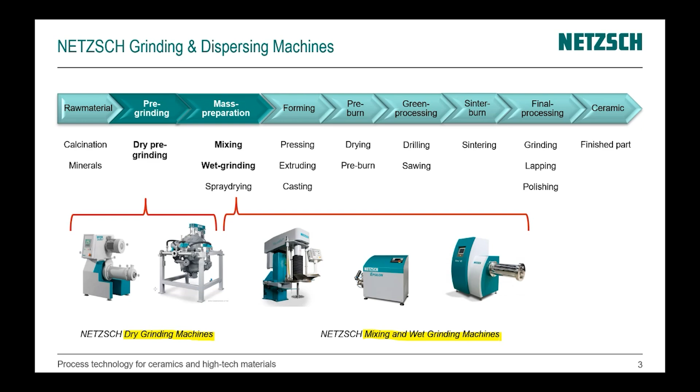ceramics. And probably it will be interesting for you to see that this company, Netzsch Grinding and Dispersing, produces dry grinding machines, which are used for ceramic production in big volumes, and also Netzsch mixing and wet grinding machines. So for those of you who are interested in the big machines, it could also be interesting. And now about our part.

We produce laboratory instruments. For example, STA, simultaneous thermal analysis for TG, thermogravimetry, and DSC, differential scanning calorimetry. Then dilatometry, LFA, laser flash analysis, and so on. We use it if the customer would like to know the behavior of a material at some temperature which can be measured, for known time and known temperatures inside the measured range of our instruments.

But sometimes, especially for ceramic situations, the temperatures are higher than the temperatures we can measure. And in this case, in order to know what happens with the material at high temperature, we use software called Kinetics Neo. It works also for milligrams and for known temperature. It takes data which are measured in the laboratory. After that, we create a kinetic model based on this data.

And after that, we can use this model to simulate what happens with the material outside of our measured range. For example, at temperatures higher than our measured range, or what happens during your industrial process, during the production of ceramics. Because of course we cannot put our laboratory instruments in the production process, but we can use Kinetics Neo to simulate and see what happens.

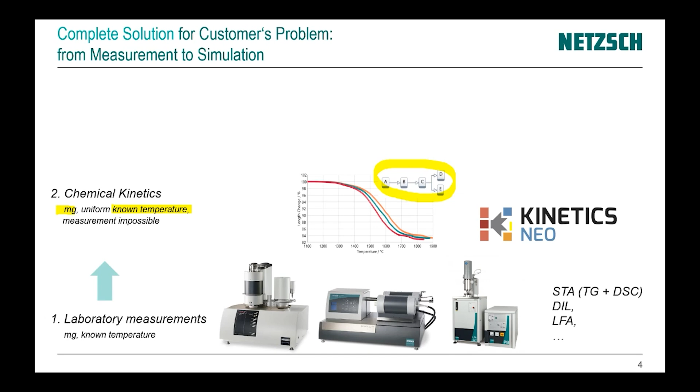For this case, we use our software, which makes a simulation in the bigger volume. It's called Thermica Neo software. It works for higher amounts of material, it takes into account temperature gradients, and it can show how a reaction goes on inside the big volume of material, how the sintering, how the debinding goes on.

Now we will speak about these two packages, Kinetics Neo and Thermica Neo. Let's start with the first one, Kinetics Neo. If we produce ceramics, for example, medical ceramics, high-tech ceramics, then the quality must be high. Sometimes if we use the microscope in order to see what is inside ceramics, we see cracks. And these cracks show us how high the quality of the ceramics is.

We would like to have the highest quality and to avoid micro cracks if possible. In this case, we must take into account the heating rate during our production. If everything goes slow, then the quality is higher and we have less microcracks. If we make the heating very fast, then there are some temperature gradients inside and the shrinkage is not uniform, and therefore there are mechanical stresses and the quality could be decreased.

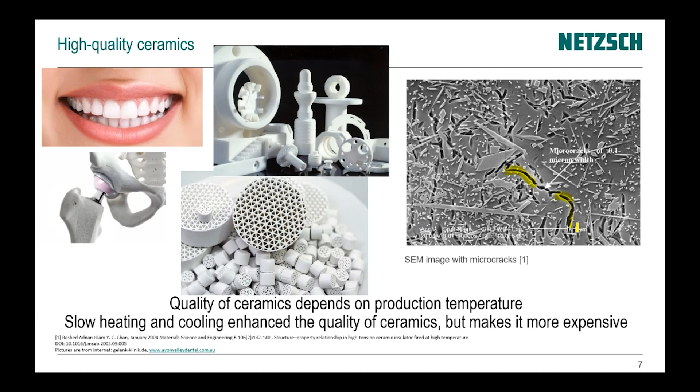So there should be some kind of optimal temperature program in order to get the best quality in the shortest time. It must be as good as possible, but as short as possible, because for the longest time the quality will be good, but at high temperature it will be very expensive and sometimes economically not reasonable. In this case, we use our instrument in order to see inside the firing process of ceramics.

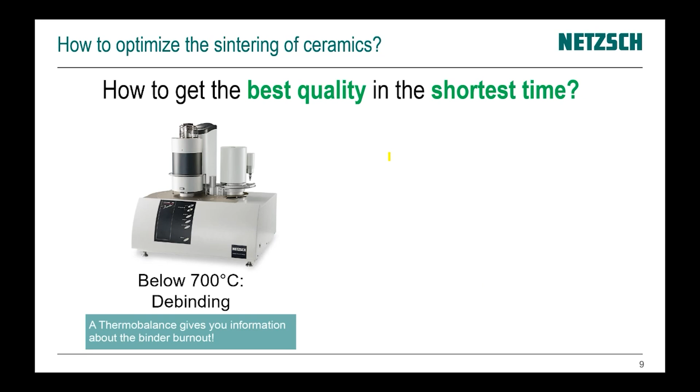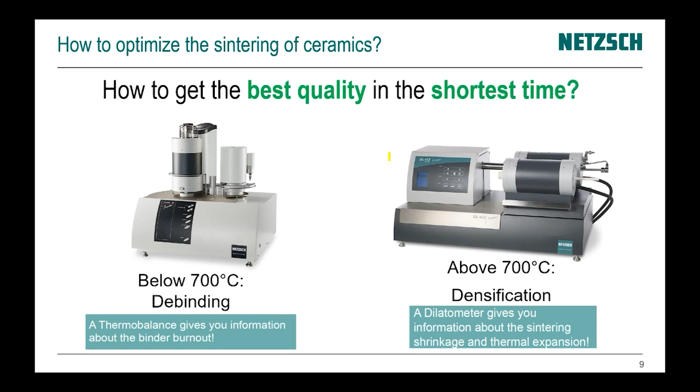There are two parts. The first part is below 700 degrees C. Here we have debinding of polymer, and we can measure this process with a thermobalance, with thermogravimetry. The second one is above 700 degrees C. It's densification of our ceramics. Here we have the changing of the length of our material, and we can measure this change of length with a dilatometer above 700 degrees C.

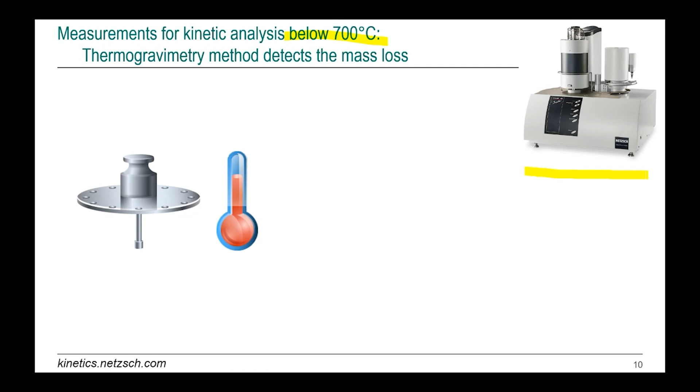How does it work? For example, below 700 degrees C we use our TGA measurement. We take our material in the laboratory, we heat it and measure the mass loss. At the beginning we have an initial mass, then a final mass, depending on the temperature. At some temperature, decomposition happens. But it doesn't always happen at the same temperature. If you make fast or slow heating, this decomposition happens either at lower or higher temperature, because our process is a kinetic process and it depends on time and temperature.

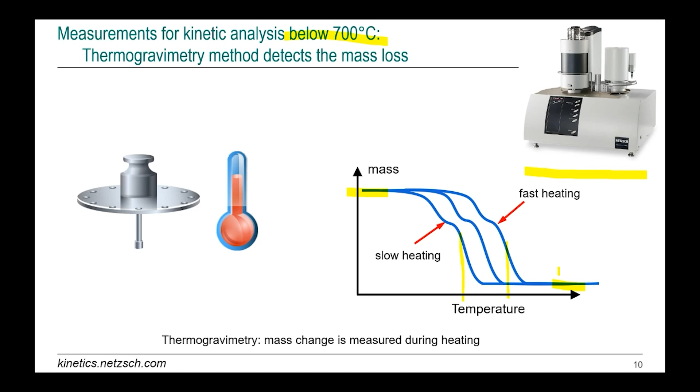Here, for example, we make real measurements with 0.1 K per minute, 1 K per minute, 10 K per minute, and we have 3 different curves, and we see the first decomposition step and the second decomposition step. Then inside our software, Kinetics Neo, we can create one kinetic model. Here is the first step, A goes to B, and then the second step, B goes to C, and this one model must be independent of time and temperature.

So it contains parameters which are independent of the time and temperature process. For example, activation energy, the concentration of initial reactant, concentration of the product, concentration of intermediate reactants. It depends on parameters like the pre-exponential factor. Behind this model is the Arrhenius equation, which shows how reaction rate depends on these parameters and on temperature.

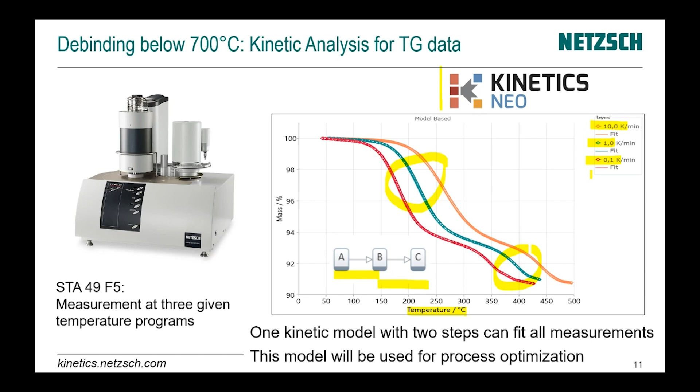If this model works well for all experimental data, for all different heating rates, then we can take this model and make a simulation at other temperatures and heating rates. So we take experimental data, create a model, and then use this model inside our software to see how decomposition goes on under any temperature program, for example, the temperature program of your production process.

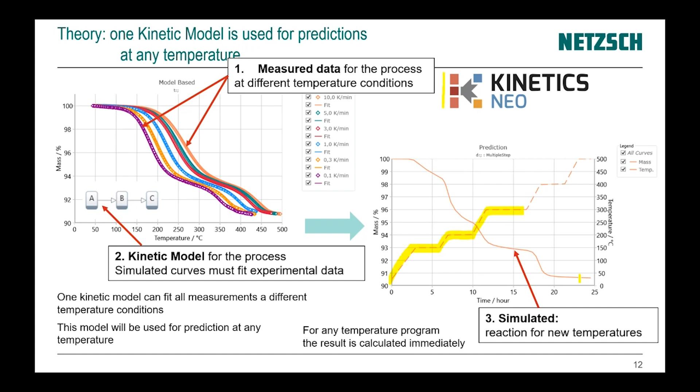Or, for example, here we can take some temperature program with heating and isotherm and see what will be the decomposition for this temperature program. And for optimization, here we can think of it as an example. We have some temperature program which has some isothermal and heating segments, and for this temperature program, we have a curve which shows the decomposition profile.

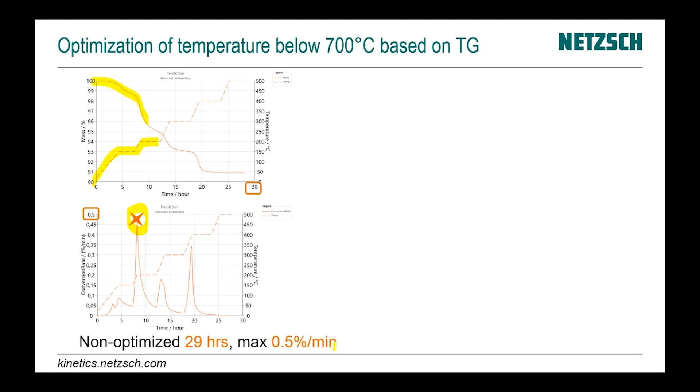The second picture is the first derivative of our simulated curve, or just a curve which happens during our production process. And now, if we would like to see how to optimize our production process, our industrial process, we can find firstly the points where the reaction rate, the decomposition rate, is the highest. So it means the points where we lose the quality. And we must additionally find the points where the reaction rate, decomposition rate, is too slow, so where we lose the time.

Why do we lose quality at this point? Because during the very intensive decomposition of polymer, we have production of gas because of decomposition. And if this happens very intensively, then usually for pressed ceramics there is no time for this gas to go out from our ceramics. And then this gas can destroy or damage the structure of our ceramics. So we must avoid the points with very intensive gas production, with very intensive decomposition.

And here, for the non-optimized process, we have 29 hours and 0.5% per minute. Here is the maximum decomposition rate. After optimization of this process inside our software, we can make it a little bit slower here in this range and a little bit faster in the range with slow decomposition. And here is our result.

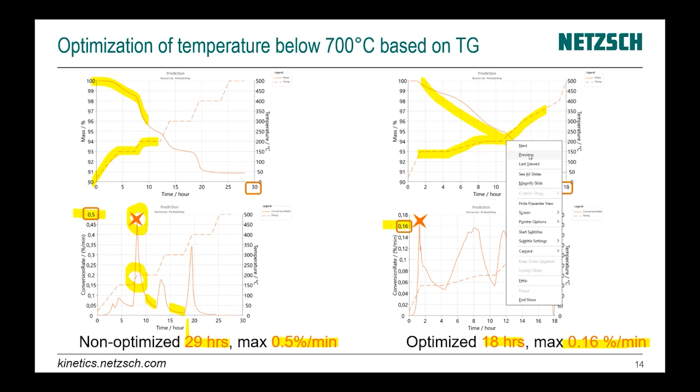Optimized, we have 18 hours, maximum 0.16% per minute. So here the maximum decomposition rate is almost 3 times less. So we have decreased the decomposition rate, we have improved the quality, and we have reduced the time during our sintering process. So this is the optimization of debinding below 700 degrees C. And now here we have an optimized temperature profile, something like this, and a more or less constant decomposition rate. Here is our result.

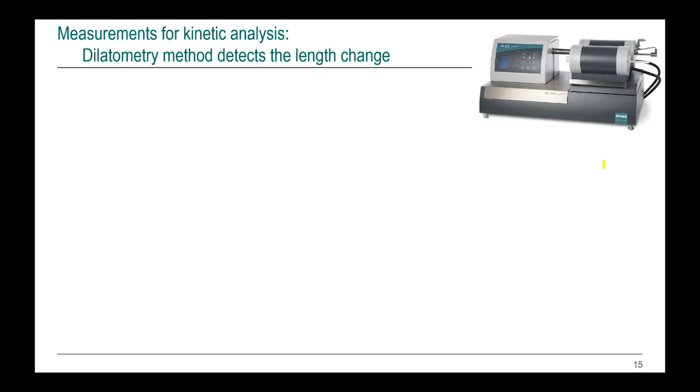And now let's see what happens above 700 degrees C. We take our dilatometer and measure the change of length of our ceramics. We measure the densification process. Here is our result. We have originally the thermal expansion. After that, there is sintering, so reducing the length of our material. And after that, we have thermal expansion after the sintering process for the product. Again, we have some temperature points where everything happens, the same as it was during decomposition.

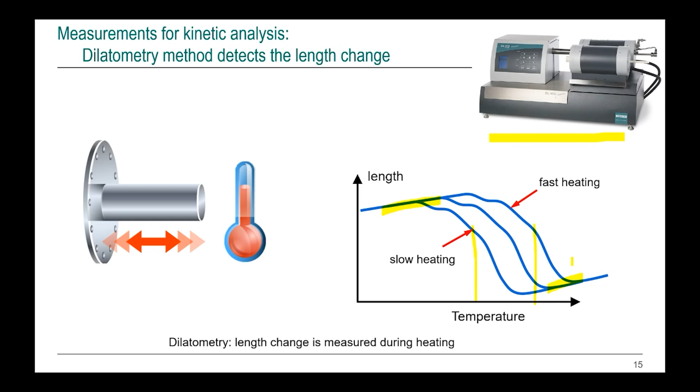Here, the result depends on the heating rate, how fast we heat during the sintering process. For slow heating, everything happens at lower temperature, and for fast heating, our sintering, our shrinkage, happens at higher temperature. And again, we can take our real data. Here, the thermal expansion is already removed. We have step number 1, step number 2, step number 3. We have created a 3-step reaction: A goes to B, B goes to C, C goes to D.

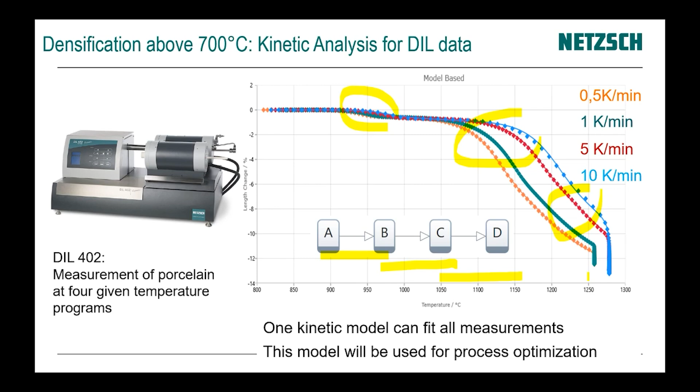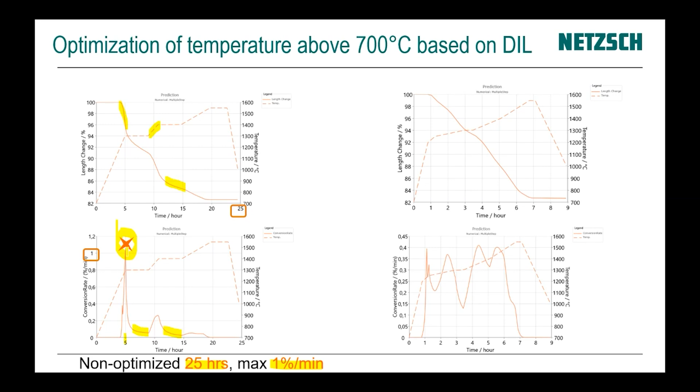Originally it was 25 hours, and 1% per minute was the maximum densification rate or shrinkage rate. After our optimization inside our software, we finally have a result of 9 hours. It's more than twice less, and the maximum shrinkage rate is 0.4% per minute, so more than twice less. In this case, we have improved the quality, we reduced the total time, and we reduced the costs of our production.

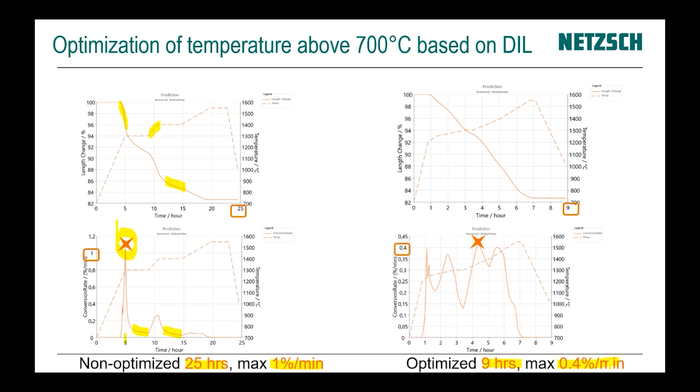That was one of our first customers where we applied this optimization, and that was the company Haldenwanger.

It is in Germany, in Bavaria. It belongs to Morgan Advanced Materials. They produce a new material called Halfoam alumina. It's really a foam, ceramic foam, and it was very sensitive to the debinding and sintering process.

And for our optimization, we just made a measurement in the laboratory, created a kinetic model, and then provided the optimized temperature profile for production of this new material. During our optimization, we reduced the production time by more than 50%. These results were presented at Ceramitec and at the NATAS conference. So that was the first one.

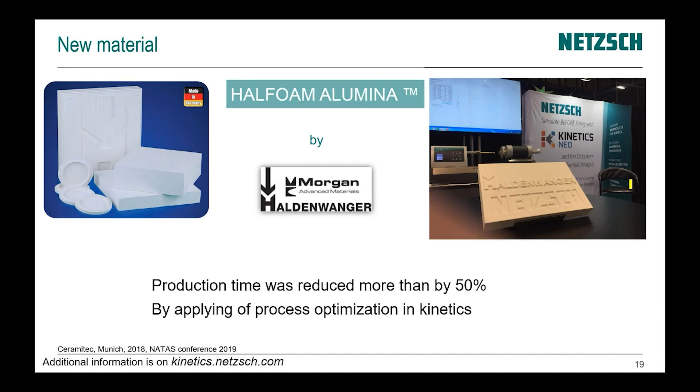The second one is very intensive. This is about 3D manufacturing, lithography-based ceramic 3D manufacturing from our partner, the company Lithoz from Austria. And here, again, results were presented at the conference, Thermal Conductivity Conference 2021.

Here, the process of 3D manufacturing uses a polymer, which is originally liquid, but it is cured under light. So it is a photocurable material, and during production we go layer by layer, and each layer is covered with liquid material, and it is cured by the light, and after that, finally, it becomes cured and not liquid anymore.

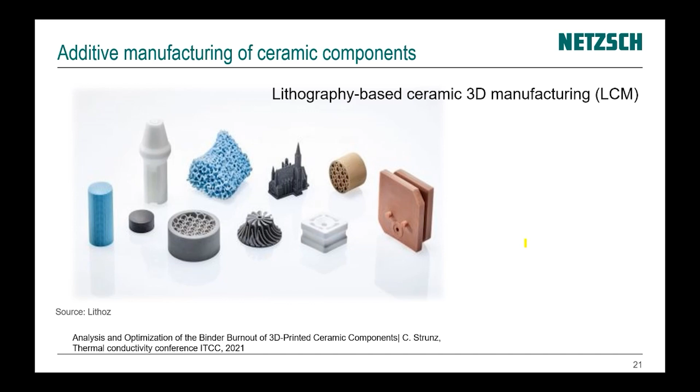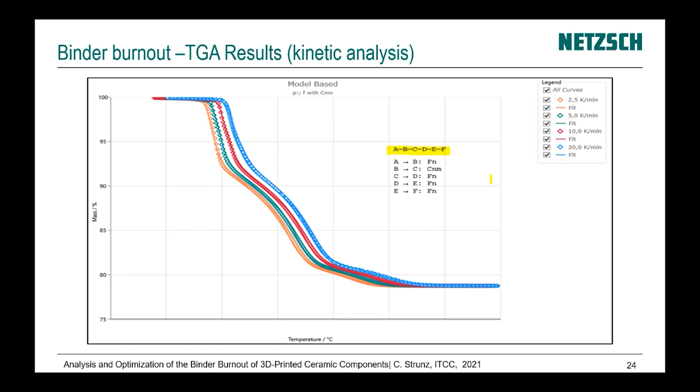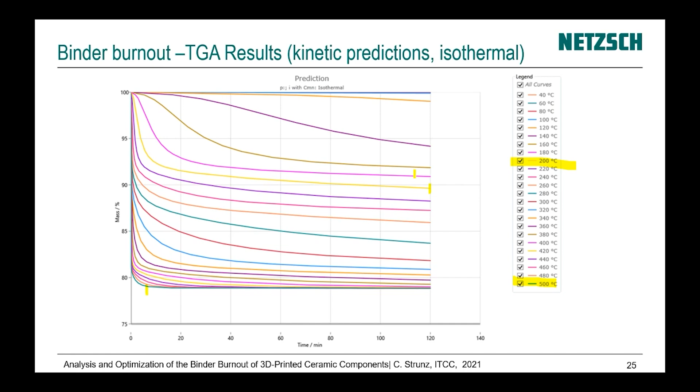For example, at 500 degrees C, it happens immediately, within 4 or 5 minutes, and for maybe the yellow one, 200 degrees C, we have decomposition of the first step at the beginning, in the first 20 minutes, and after that, after 2 hours, we have decomposition of only 10%. That was the second point.

That was about using our Kinetics Neo software for creating a model and optimizing the process. But usually we must know what happens for non-uniform temperature, where we have a bigger amount of material.

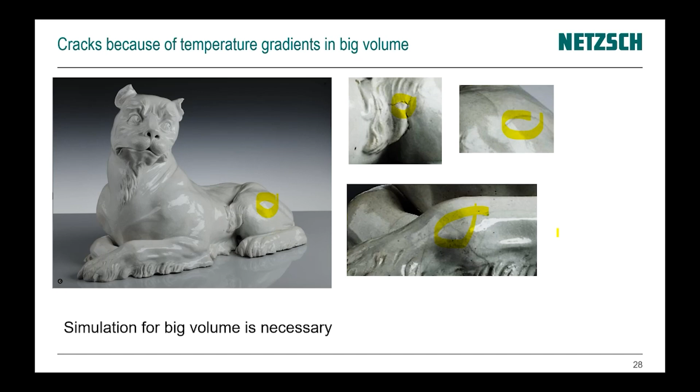For example, if you go to some porcelain museum and see a big volume of material, then you see some cracks everywhere. And these cracks come because the production process was too intensive. Then there are big temperature gradients inside the volume, and then there are mechanical stresses which produce these cracks. During our production, we must avoid these cracks, and therefore we must know exactly what the temperature gradients inside our volume are.

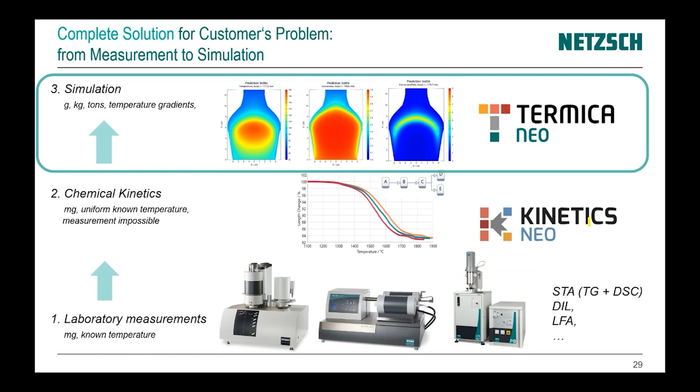So in this case, we can use our second software, which is called Termica software. Here we can work with non-uniform temperature, and we can calculate how the process goes on in the big volume. And we can speak here about both processes, about debinding and about sintering.

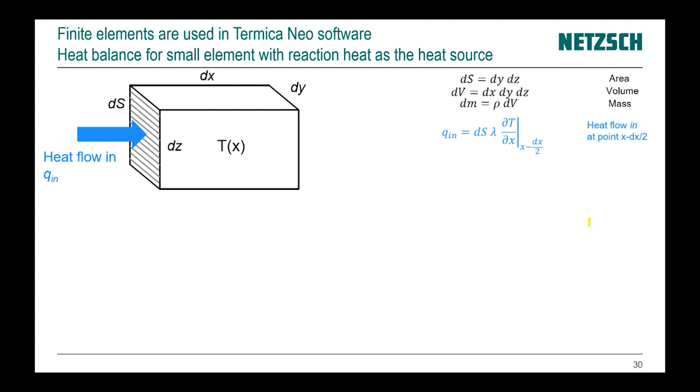How it works: we take internally a small volume of material. We can calculate how much energy comes in and how much energy goes out. We can calculate how much energy is produced because of chemical reaction, which is sometimes important during decomposition. Then we calculate a heat balance, and we can see if this heat balance is positive or negative, and if this small volume undergoes self-heating or self-cooling.

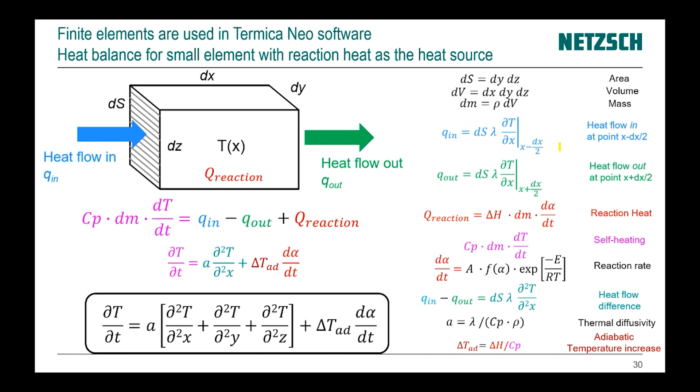And after a bit of mathematics, we have a normal heat transfer equation. Inside our software, we solve this heat transfer equation together with the chemical equations corresponding to our kinetic model. And the kinetic model is taken from the first software package, the Kinetics Neo software. So the first data for simulation is our kinetic model. We just take it directly from our software.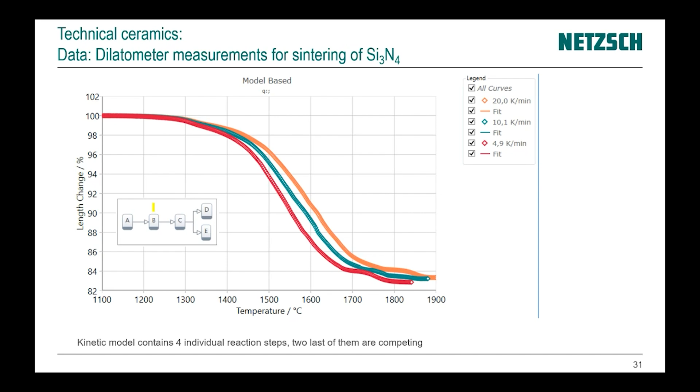It is not necessary to transfer each parameter and each equation from one software to another. You just select your kinetic project, and then you have the result here. Here, for example, we have dilatometer measurements for silicon nitride, and we have a 4-step model for it. That was the first data for simulation.

Additionally, for simulation, we need the physical data. These are specific heat capacity, density, and thermal conductivity. All data must be temperature dependent because there is a big difference between the values at room temperature and the values at high temperature during our production process.

The physical properties of the most used materials are inside our material library, and you can just select, for example, this silicon nitride green body in our material library, and then specific heat, density and thermal conductivity are already inside your project. This is the second point.

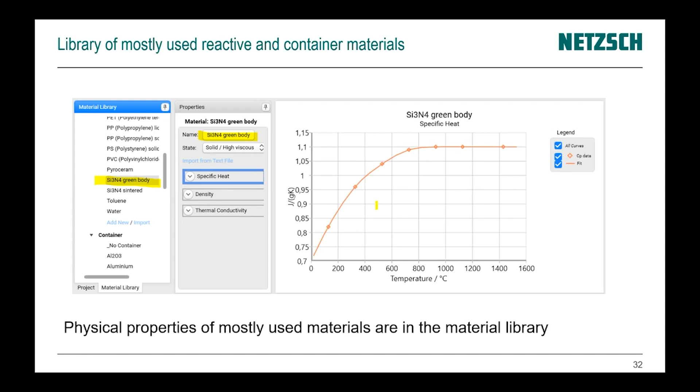Sometimes, especially for ceramics, the physical properties of material are not the same for the original green body and for ceramics after sintering. Here we have the green body properties before sintering and after sintering. Specific heat is more or less the same; it is increasing, and the final value is about 1. It's okay. But for example, with density, it is totally different.

You know that during the sintering of ceramic, we have this densification. And finally, the density of our ceramic product is much higher than the density of the original green body. So, for example, here for silicon nitride, the original green body has a density of about 1.7, and after the sintering it is more than 3. So it is almost factor 2, the changing of density during our process.

And the next one is thermal conductivity. And here the changing of thermal conductivity is really very high, because at the beginning we have a green body as a porous material or just a mixture with the polymer. And after all sintering, we have material which is almost solid with crystals or glasses inside, and then the thermal conductivity of the final product is really much higher than the thermal conductivity of the original product.

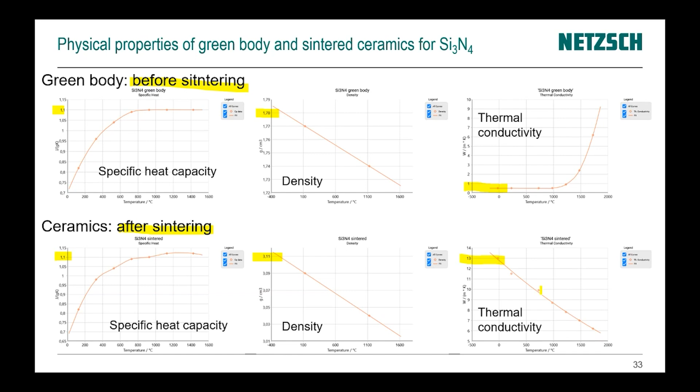So it means that during the simulation, we must not only see how thermal conductivity depends on the temperature, but we must calculate the concentration of initial material, concentration of final material, and calculate the intermediate value of thermal conductivity and use it and see how it works. Otherwise, the results of simulation will be not correct. That was the next point.

And of course, we must select the geometry, and for geometry there could be different properties on the top, on the bottom, on the side. We can select the emissivity coefficient. For example, it depends on the color of material. For black ceramics, it will be totally different than for white or yellow ceramics. And all this emissivity data is already in our material library. You don't have to search for it somewhere. You can just take it from the material library.

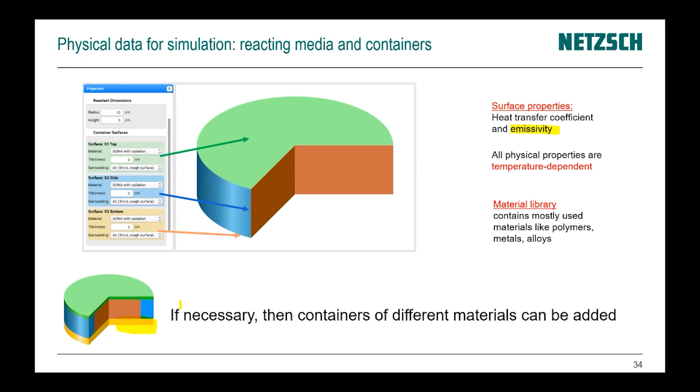If it's necessary, then you can use some substrate on the bottom of your ceramic part, or you can use some material on the top and on the side if it's necessary. If not necessary, then you can skip it. And now results could be shown.

For example, for the cylinder, you can select different points on the axis and see the temperature at each point on the vertical axis, for example, for a rotational body like a cylinder. Or you can make radial points here and compare the temperature at different radial distances. And here you can select different vertical positions, so you can put these radial points close to the top or close to the bottom.

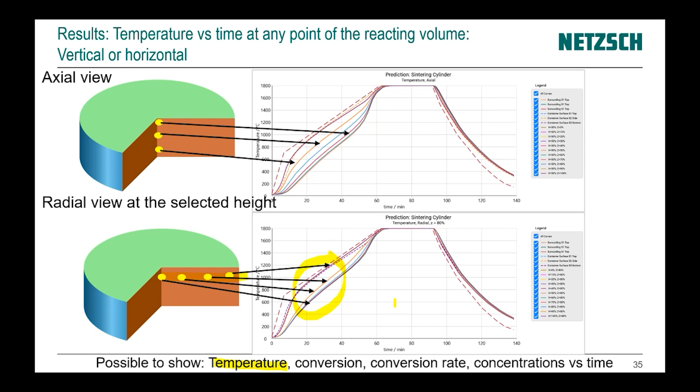These are the results, and as a result, you can see the temperature like it shows here. You can see conversion rate, or concentration versus time. Here we have different thermal conductivity before and after reaction. I already told you that 0.5 is the thermal conductivity of material before sintering, and 13 is the thermal conductivity of the product. Inside the software, you can select the material before sintering with its physical properties, and material after sintering with other properties. Then the software calculates at which time and at which temperature the sintering, the shrinkage, happens.

And exactly at these times, the software recalculates the value of thermal conductivity. You see that before sintering, we have a lower value of thermal conductivity, and we have a big difference between the temperatures at different points inside our part, because thermal conductivity is not very good. And after sintering, somewhere here, for example, we have less difference between temperatures at different points of our part. Why? Because the thermal conductivity is higher, and this changing of thermal conductivity is taken into account, of course.

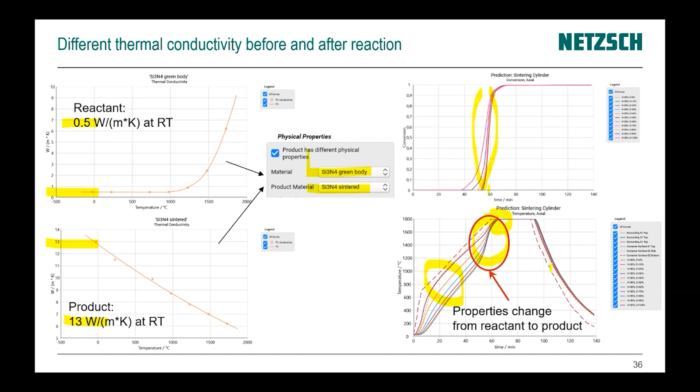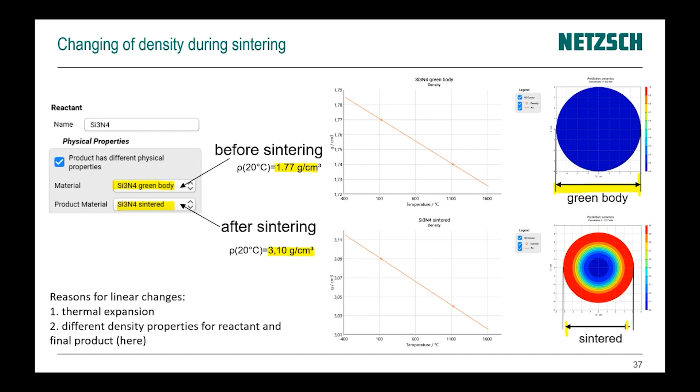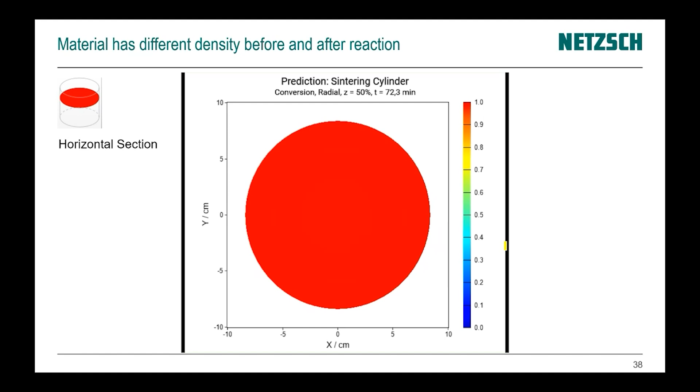And the next part shows how the changing of density is shown inside the software. So here for the green body, the density before sintering is 1.7. After sintering, for the product, we have a density of 3.1. And our software, Thermica software, will show you the real size of your material. For the green body, it will be a big size, and for the sintered material, it shows only a small size. And here for the cylinder, we show that the size of material will be decreased.

We can also see the concentration of each component during sintering. For example, we have some kinetic process with steps: A goes to B, B goes to C, and then C goes to D and to E. In this case, B and C are the intermediate components. During the sintering process, sometimes crystallization or recrystallization happens, and we can speak about some intermediate material or intermediate components.

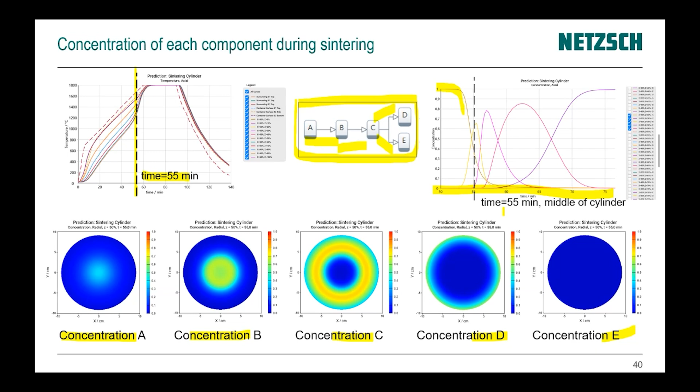We can also see the concentration of this reactant as a function of time. Here is the concentration of A, B, C, D, and so on. So it is possible for you to see inside your process and simulate what happens during your process, or maybe during your production process.

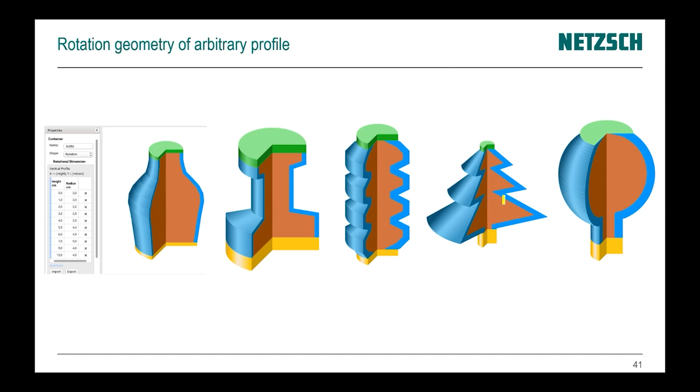Now we can create in our software not totally arbitrary geometry, but we can apply, for example, rotational geometry with arbitrary profile. So it is two-dimensional arbitrary, like this one. And here we can calculate a temperature conversion rate.

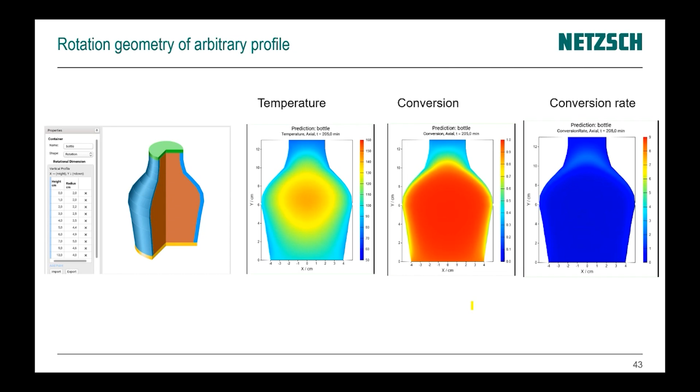You see how it looks like here during the simulation, and we can make some temperature profile here or temperature profile here.

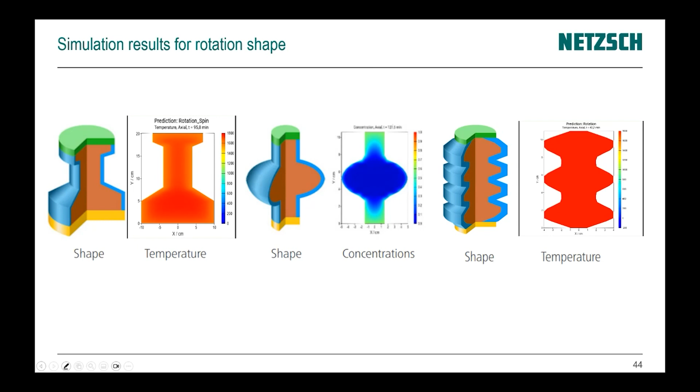Now I have a few minutes just to show how it looks like inside our software. So firstly is our Kinetics Neo software. Here we have alumina, the sintering of alumina, and the measurements are dilatometer measurements with 3, 10, and 30 K per minute.

Here we can create either TG or dilatometer data. I just loaded this data. After that, we can open analysis and create a kinetic model. For example, now I just create with one click the model-free kinetic model.

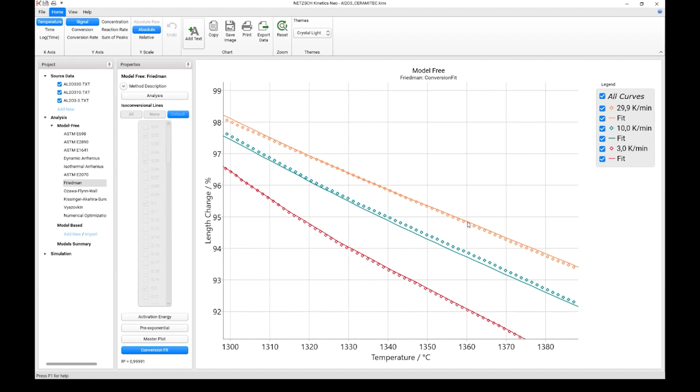Here we see the points are experimental data and the lines are our simulation according to this model. And we see that this one model can describe all three curves, which are measured at different experimental conditions.

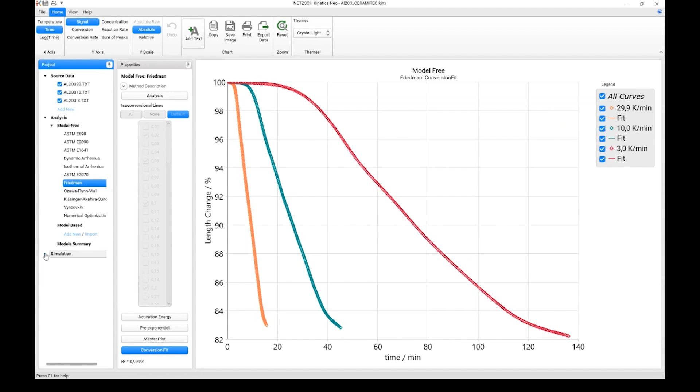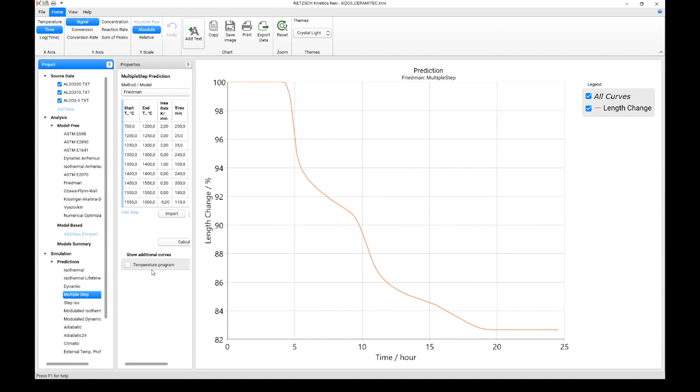And now we can take this model and make a simulation for some temperature profile. For example, here is a multiple step. I can see this as temperature or time, and see that here the dashed line is the loaded temperature profile, which is still not optimized, and the solid line is the changing of length, which is calculated with the software using our kinetic model, which is created right now.

And if we calculate the first derivative, then we see how it looks like. At 5 hours, it is the highest.

Now we must reduce here the heating rate. For example, here we just put 0.2 K per minute. And now you see the peak is not as high as it was.

And for some points, we can make it shorter. For example, at the beginning, from 0 to 4 hours happens nothing, so it means the first heating segment must be faster. I just put here a higher heating rate. Now the first segment becomes shorter, and we have shortened the total program.

For example, here between 5 and 8 hours, we have the isothermal segment of 4 hours. We can make it shorter, for example 30 minutes. Here, this one, and see, calculate. Now it is short. Then we can make the next one shorter too, also 30 minutes. Something like this. Remove the last one.

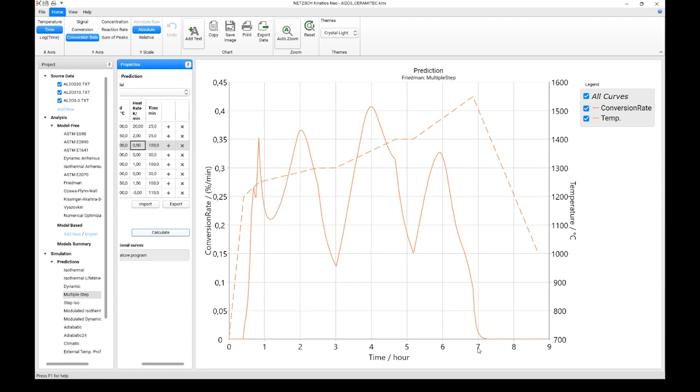So this is our result, more or less. It becomes shorter, and the maximum becomes lower. So we improved the quality and reduced the time.

And now our signal has more or less a constant rate, so the length change is more or less constant. If it is faster, then we have cracks and mechanical stresses, and if it's slower, then we just lose time and increase the cost. So this is some kind of optimal result.

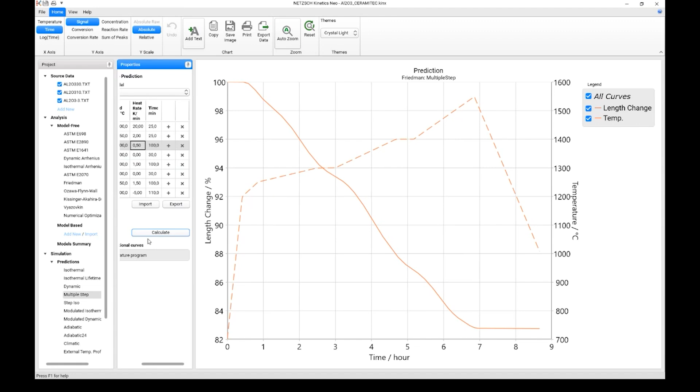That was for kinetics now, and you can put here any temperatures what you want. You just see many steps. Each step has initial temperature, final temperature, heating rate. You can add a new step, you can remove each step. So you can just put your temperature, or you can import the data which is recorded as a temperature from your industrial process, and then you can directly see what happens.

That was Kinetics Neo. And now about our Thermica Neo software. Here I just close everything. Here we can create a new project which is empty, or a new project with a library, material library. Here I just take the first data for silicon nitride.

We can just see it as a function of temperature or as a time.

The kinetic data is normally taken from our kinetic project. It is not necessary to put each activation energy, reaction order, or each reaction step from one project to another. They are totally compatible with each other.

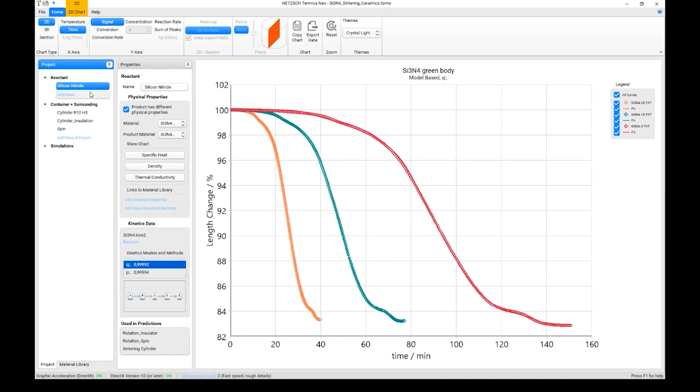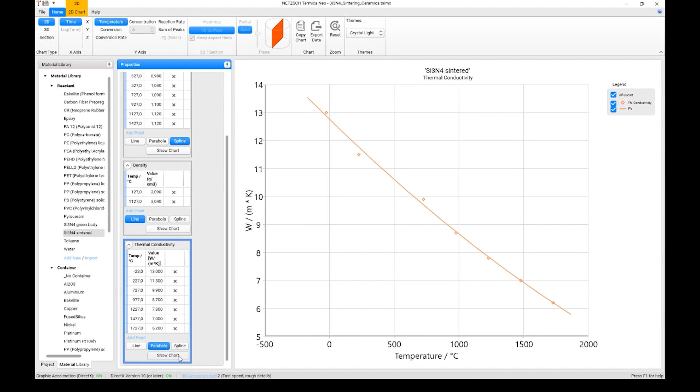After that, for this material, it is necessary to select the physical properties. There are different physical properties for the original material and for the final material after sintering. We select silicon nitride green body from the library for the initial material, and silicon nitride sintered for the final properties. For the initial material we can see specific heat, density, and thermal conductivity as a function of temperature. And in the material library, for the sinterate, this is the specific heat, density, and thermal conductivity which will be used during our simulation.

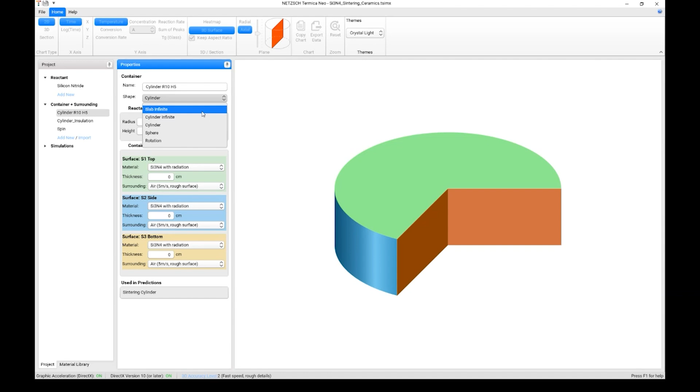Now I go back, that was the material. Now we select geometry. We can select a geometry, for example cylinder, or something like a slab. We can create some substrate here and select material for each. For the first one we can remove the substrate, so it's up to you, or we can remove it for all of them, or we can create another shape, for example an arbitrary shape. For each surface we can set if there is some substrate or some container material.

It's called, as we call it inside our software, or we can switch on the radiation, because for high temperatures, the radiation and emissivity are a very important process for the heat transfer on the surface. That was the second point.

What also should be selected here is the surrounding. For the surrounding, it is important for the heat transfer between the surface of our ceramic and the surrounding. For ceramics it is usually air, but this air can have a different flow rate. If the flow rate is low, the heat transfer will not be as high as when the flow rate is high. In this case we have in the library different air flow rates, and you can select your case, which corresponds to your oven, to your furnace. After that you will have the correct heat transfer between the surface of ceramic and the surrounding.

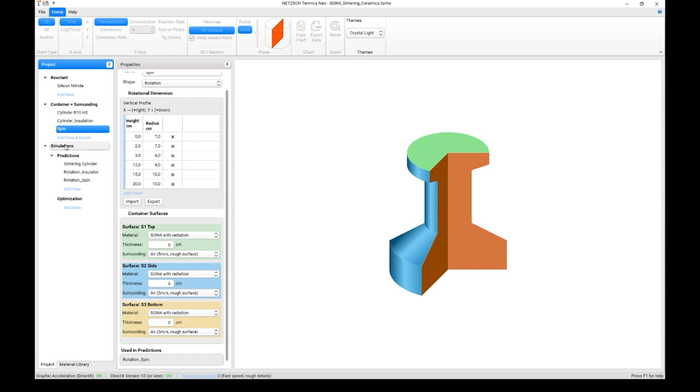Here it is selected, and after that we can select a simulation. For example, we can put a temperature profile of the surrounding temperature of the air. This air could be measured in your furnace, and after that we can run a simulation and see how it looks.

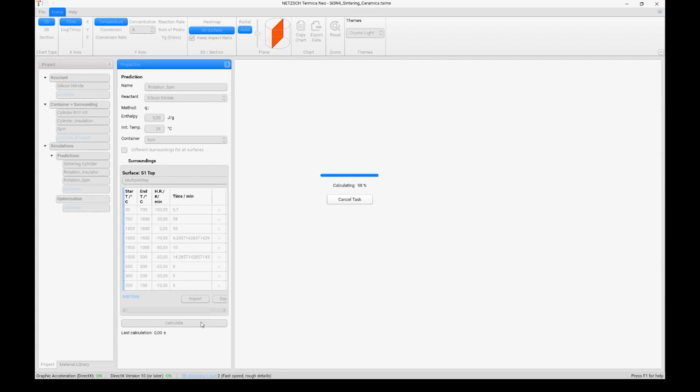For the simulation, there is a possibility to make a rough simulation, which is fast. It is selected right now, or we can select the fine simulation, which will be very, very slow.

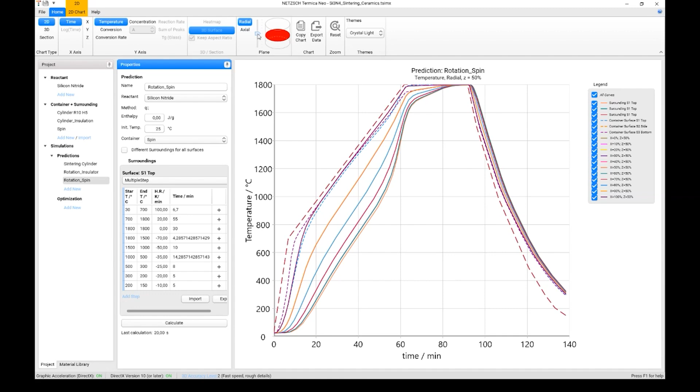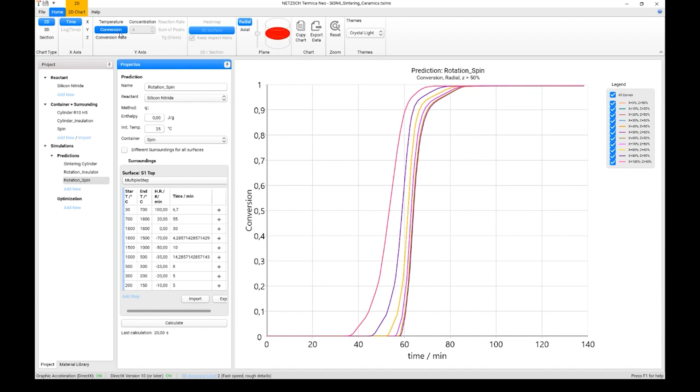For our part, we can select either radial results or axial results. On the top plane we can use either a vertical plane or a horizontal plane. For a radial plane we can see if the results are close to the top or close to the bottom. Here we have the temperature, and we can also see conversion or conversion rate, something like this. That was the 2D graphs depending on time.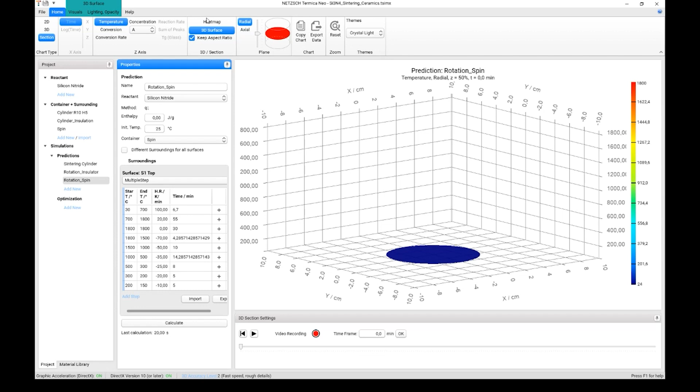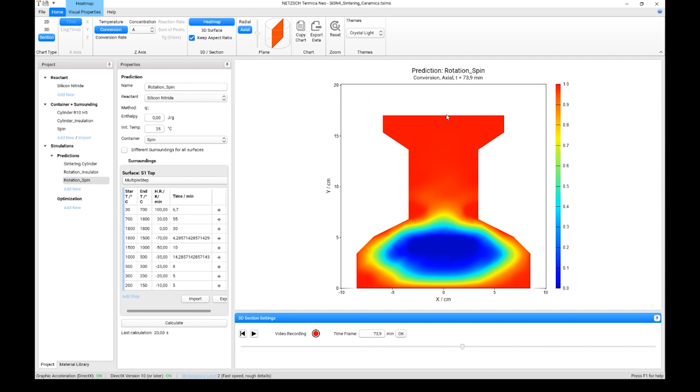Or we can select a section as a heat map. I'll select radial and see how the temperature changed. This is a rotation body, and we can see how the temperature changes during our simulation. This is our result. We can also see the conversion, it's a shrinkage, degree of shrinkage, how it progresses inside our simulation. You can see the changing of the linear size of our material. And we can also see the concentration, concentration for A, for B, for C, for D, for E. So these are our results.

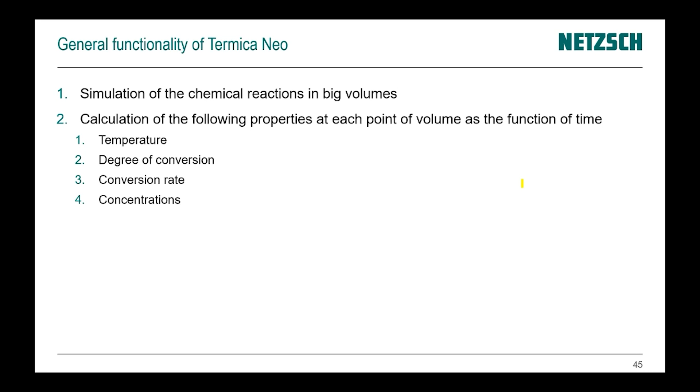And now let's go to the final slides of our presentation. Termica can calculate temperature, degree of conversion, conversion rate, and concentrations. Our kinetics is based on the current state of the ICTAC Kinetics Committee recommendation for analysis of multi-step kinetics, and we fulfill all of these recommendations inside our software.

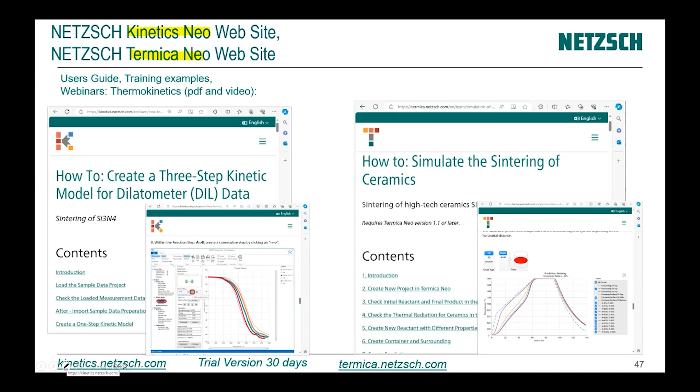Inside the website, you can say request trial version, and after installation you can go to the learn section just to see some training examples which are done specially for sintering. That's all from my side.

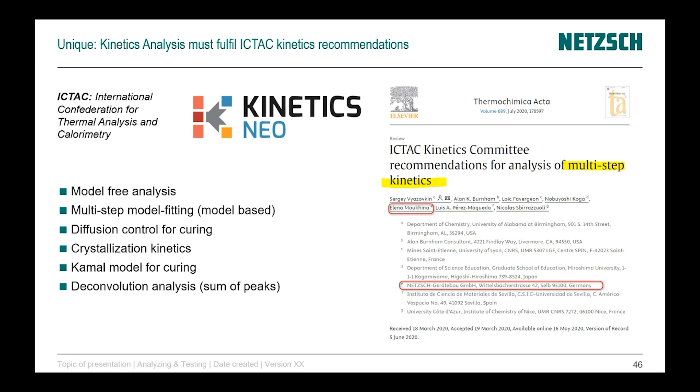Great. Yeah, I think that's a good tip. Then I would go on with the next question. Somebody says the optimization being shown is quite a manual process, for example tweaking the heating rates and time points manually. Is there any way to use an algorithm or machine learning to optimize the profile further more easily?

Yes, so I showed you a manual process because for some of our customers there are some limitations for the furnace. For example, the furnace cannot go higher than 30 degrees K per minute or something like this. So, and therefore we must take into account the limitation of the furnace.

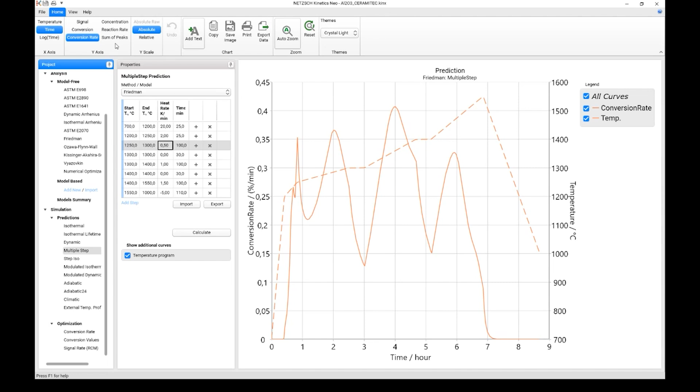But here, do you see my software? Here we have conversion rate, maximum conversion rate is 0.4. We can make the ideal case with 0.4. I just go to conversion rate, here optimization, and I can put here 0.4% per minute, calculate, and this is the result. This is the ideal case, which is not manual. So, and after that, you must try to get your furnace to this ideal temperature profile with the constant conversion rate, constant length change rate for our process.

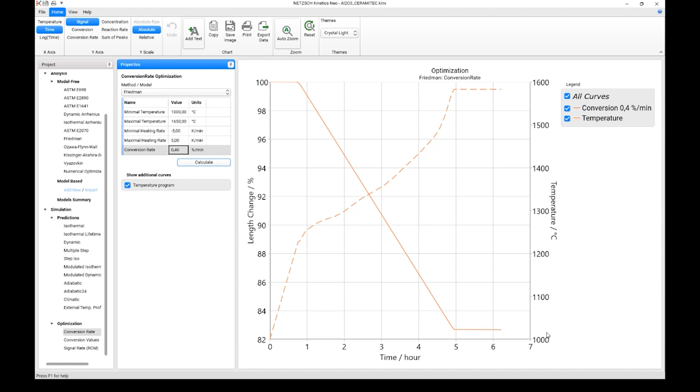Okay. Okay, thank you so much, Elena. I would go on with the next question. If we are using non-library materials, is there a guide to creating new library entries? For example, what data is needed?

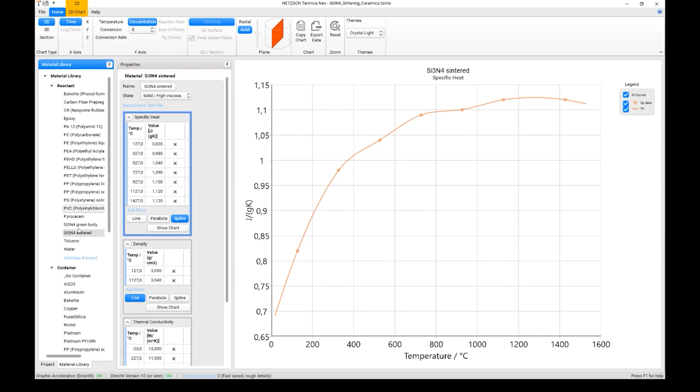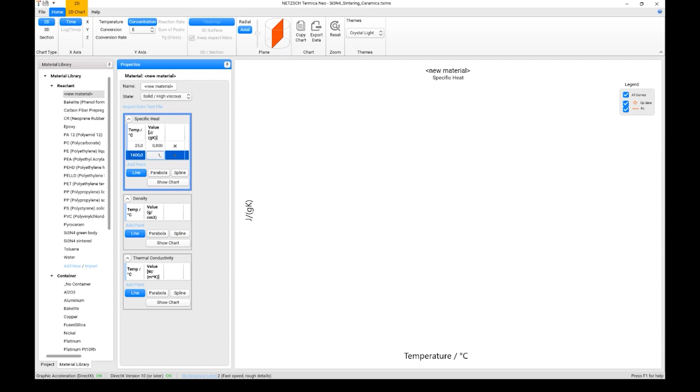Yes, it is inside. So here we have reactant, we can add a new material. And after that, there is specific heat, density and thermal conductivity, and it is empty. You can just put the new points. For example, for room temperature it will be, I don't know, 0.8, and for 1600 it will be 1.3. And then we see this result. So you can just put data in, or you can just make the import of data if you have this already as a table. So this is specific heat, density, thermal conductivity, and it is everything written in our documentation. So if you have the software, then you have everything.